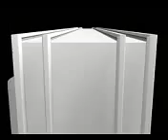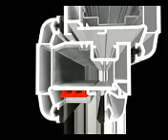The most significant change with the Synergy suite is that it uses a single leg bead, or as we call it, a J bead. This one bead glazes the entire suite. Not only does this bead operate with a simple knock-in operation, dramatically cutting down on installation time, but the unique sculptured design matches perfectly to that of the upstand on the profile, providing one of the most visually striking benefits: balance.

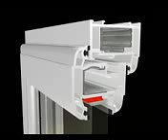Synergy is perfectly balanced from every aspect. No more do the sightlines of your windows have to be mixed by compromising different bead shapes with profile shapes. In fact, the profiles are so perfectly balanced that there is absolutely no requirement for the traditional Z sash.

Whilst Synergy has been designed primarily for the internally beaded market, this perfect balance enables the fabricator to fit an internally beaded T-sash into an externally beaded window frame. The sightlines are identical either way.

This single casement sash features a centrally located full-depth Eurogroove. This enables you to choose freely which hardware specification you wish to use without the restriction of having to use locking mechanisms that only fit into half-depth Eurogrooves.

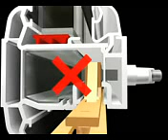The sash case depth comfortably houses a 22mm backset Espagnolette system. This moves the window handle comfortably away from the transom without having to use cranked window handles. The central location of the sash Eurogroove gives a positive and consistent location during operation. Both window and door sash profiles provide a constant 8mm cover to the frame, providing ample protection from the elements.

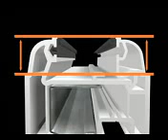Because the shape of the bead coordinates perfectly with the profile upstand, the height is also identical. When looking straight at a Synergy window, you will not encounter the step of many other systems where the bead or upstand is set at a different height.

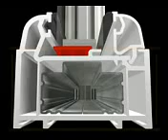This uniformity also provides an identical flat face height on all three outer frame sections. The benefit to this is plain to see for anyone familiar with the internally beaded window. Because the flat is identical in size on both sides, when the profile is turned around during the reverse butt process, you now produce an equal-sided V-weld. Internally beaded windows no longer have to have odd sightlines where they have been re-welded together.

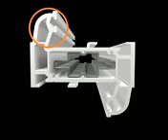In fact, the simple, consistent design of the Synergy suite means that the entire system can be welded with the same set of welding blocks, whether sash, frame, window, tilt and turn, or door - one set of blocks, any welder, any profile. When it comes to cleaning the Synergy joints, the positive step at both the top and the bottom

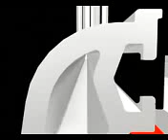of the Synergy sculpture creates a positive datum point for the cleaning process to start and finish. Whether cleaning by hand or by CNC equipment, Synergy has been designed to help make this process easier, and by making it easier, a more consistent finish can be achieved.

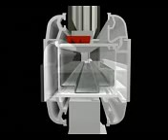Synergy leaves no questions asked with respect to ability. From launch, it incorporates 3 outer-frame sections, 3 transom sections, a tilt and turn sash, even 2 odd leg profiles.

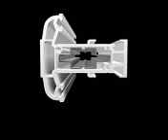Because the entire suite uses the same frame extension detail as our shield profile system, Synergy immediately takes advantage of a complete range of ancillary profiles and the hugely successful 70mm inline sliding patio door system, available directly from Synseal in convenient height and width kit format.

Not only will these products coordinate perfectly in color and finish, but most importantly, Synergy benefits heavily from our experience in the conservatory market. The Synergy trim pack incorporates an internal eaves beam cladding system, a rafter bottom cap, and even a ridge bottom cap marrying up this fabulous sculptured detail.

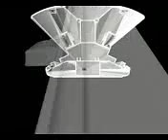Conservatories are a critical element in your window market today, yet window systems are still created without any consideration for the conservatory solution. The visual and cohesive impact of a conservatory coordinating perfectly in color, sculpture, and low gasket sightline - Synergy Conservatory is truly inspiring.

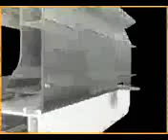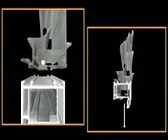Due to the same frame extension details matching that of the shield system, Synergy inherits the unique and patented turnbuckle system. The turnbuckle operation means that eaves beams do not have to be screwed through onto window frames anymore. They simply knit the conservatory roof onto the conservatory walls with a simple internal lever location. This is a serious conservatory solution for those who want to be serious about conservatories.

Of course, this low gasket sightline features throughout the Synergy window and door suite, as it is entirely pre-gasketed on the extrusion line. The unique shape of the Synergy pre-gasket could be described as neither a bubble nor a flipper, as it acquires the best of both products.

It maintains the fin effect of the flipper for weather fastness, whilst retaining the shape integrity of the bubble by incorporating the extra support leg.

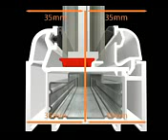Because the profile upstand and the bead are identical, and the fact that this suite has not been compromised by using non-28mm glazing options, the 28mm sealed unit sits perfectly in the middle of the profile section. This equality and centralization epitomizes the benefits of the Synergy window and door suite, removing complications with simple design concepts.